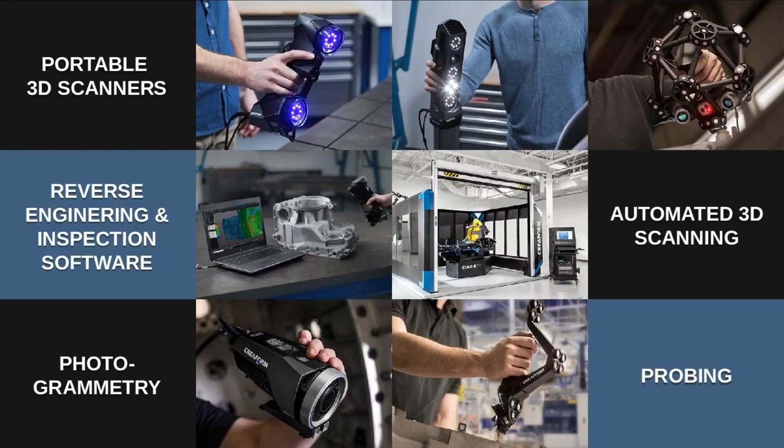What you'll see this morning is going to be a little bit about our handheld scanners, but we also do reverse engineering and inspection softwares, have an offering of automated 3D scanning, photogrammetry solutions, and you also will see a little bit of our probing solutions that we have to offer.

To begin with our handheld scanners, you'll see a little bit of the HandyScan Black Series. Several scanners within this line that have accuracies from 25 microns down to 12 microns of accuracy. Very fast scanners acquiring data at a 1.3 million measurements per second rate and can scan a variety of size parts. The scanner is also ISO 17025 certified. So if you need that capability, it's there for you.

In addition to this, we also have our HandyScan Silver Series. A little bit less accuracy, but still incredibly accurate at 30 microns. A little bit slower, but it's designed for someone that's using it not as much for inspection, but reverse engineering or maybe a less accurate inspection. Very fast, 480,000 measurements per second, same large part size range for this one.

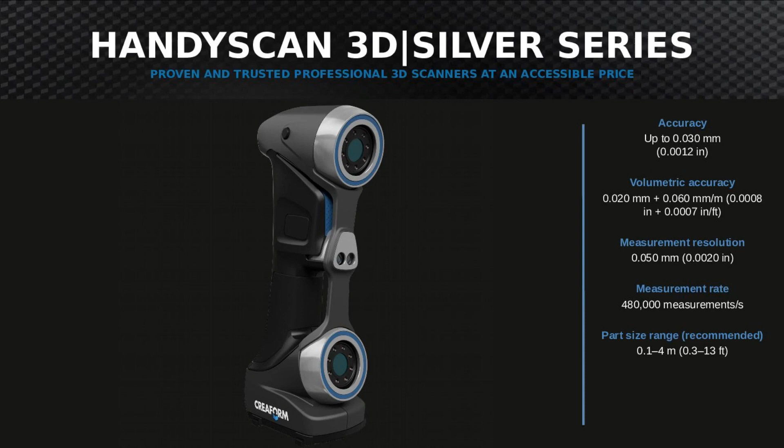This one's available in a red laser and a blue laser, where the Black line is only available in a blue laser, which allows you to have more flexibility to scan shiny, chrome, black, white, you name it, any kind of part. In addition to that, we also have our GoScan Spark, very fast scanner.

This one measures at 1.5 million measurements per second, same range of parts, but will capture color and texture. So if you're doing architectural pieces, anything for like museum quality, where you need to capture the detail, or you're trying to use your scan for marketing purposes, this will allow you to do so. And at the end, I'll show you some of the images captured with this particular scanner as well.

As you can see here, here's a small range of what we can do with the scanners. This is a HandyScan in use. You're scanning everything from a helicopter to brakes to landing gears to motorcycle parts. A range that's basically unlimited for you. Simply placing targets on the environment or on the part itself allows you to scan that part.

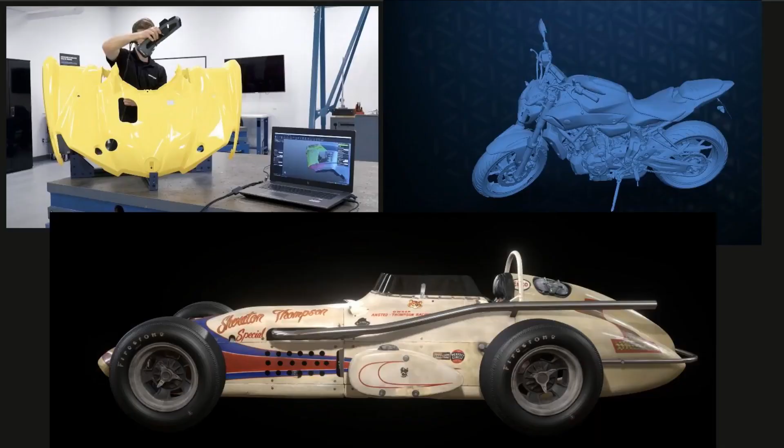And then when you talk about the GoScan Spark, you have the flexibility of scanning parts like this. You can scan a whole motorcycle with less targets, if any targets at all, because it will use the geometry and texture to track itself. On the left-hand side, you'll see that we have no targets on that part to scan that hood. And as I mentioned earlier, you can scan in color.

So the item you see in the bottom here, this whole race car was scanned with a Go Scan Spark, capturing all the texture, all the lettering, color very accurately. Now that you've seen a little bit of our handheld scanners, I'm going to turn it back to Melissa, and you'll go over to the demo.

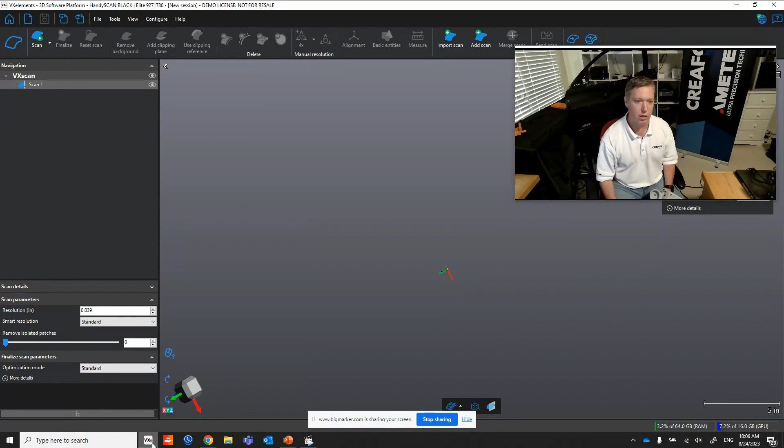So I'm going to dive into some of the technical stuff and show you exactly how these scanners work. We're going to show two scanners this morning, the HandyScan and the MetraScan. So let's start with the HandyScan. This is it. Weighs 2.1 pounds. This is a laser scanner.

So we have laser cross emitters right here in the middle and two cameras that see those lasers projected on the part. And that's what, through stereo vision, creates the 3D model. Now, these cameras look sort of unorthodox because they also emit infrared light. Since our systems are purely handheld, they're not fixed on a tripod and they're not on an articulated arm that is sort of trying to figure out where the scanner is.

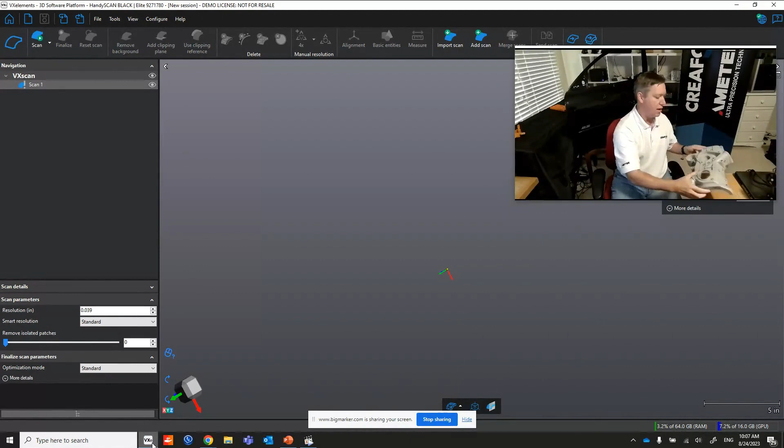This scanner knows where it is by using targets. And when I say targets, I mean these retroreflective stickers that the HandyScan requires in order to know where it is. It's just like constellations in the night sky. When the cameras can see these targets, it's able to very accurately know where the scanner is relative to the surface.

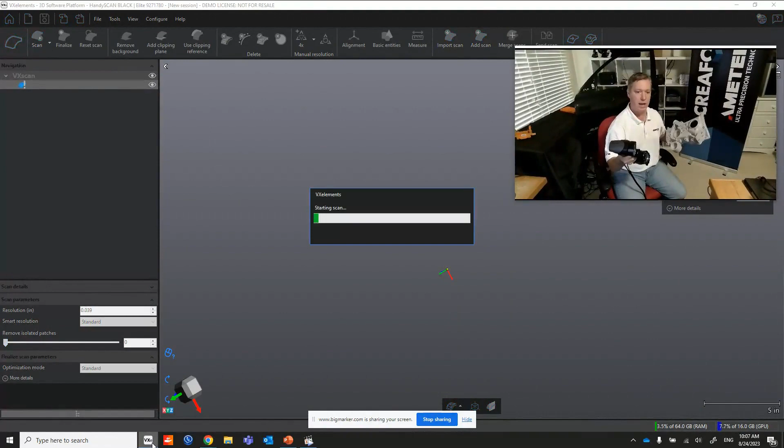All right, so enough talking. Let's just turn on the scanner. We'll tell it to start a new scan, and we'll start scanning. Now, the Creaform software generates this mesh model in real time. So you're able to easily see everywhere you've scanned and everywhere you still need to scan.

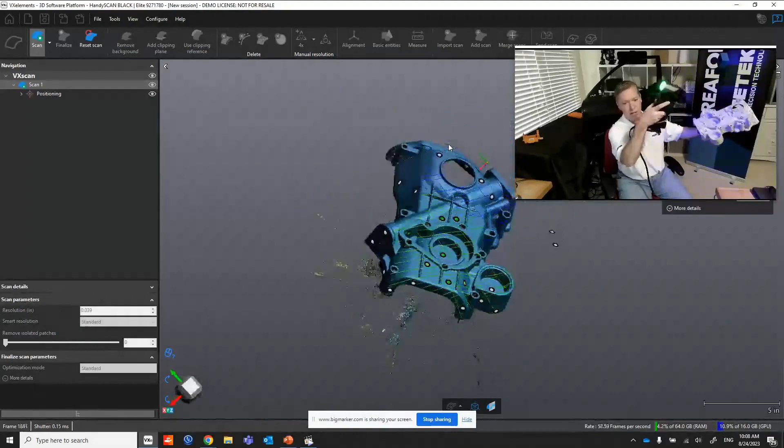And if you need to stop or look at the model, rotate it on screen to see where it is, or even leave the part and come back hours or even the next day to continue your scan, you can always resume. Now, as Rich said, the accuracy of the HandyScan Black Elite that I'm using is 9/10 of a thousandth of an inch.

All right, let's say our scan is complete, and let's look at what we have. So I'm going to click on the model to select everything connected to the point where I clicked and get rid of everything else. I don't normally hold parts while scanning them, but it makes for an effective demonstration to understand the scanner simply knows where it is relative to the part and the targets on the part. So it doesn't matter if we move the scanner or move the part, everything will be aligned.

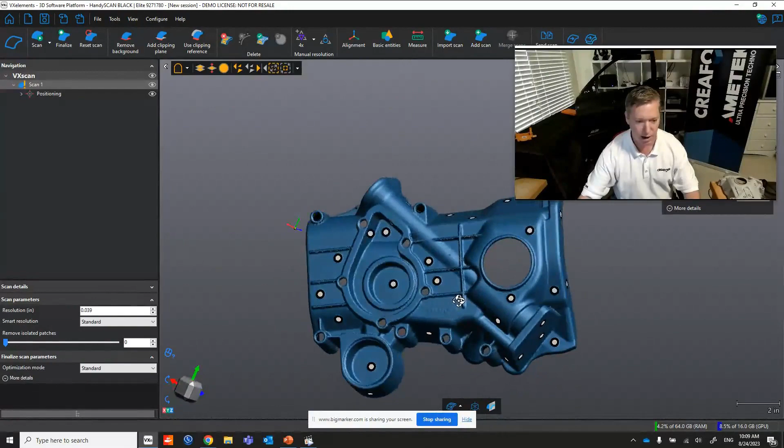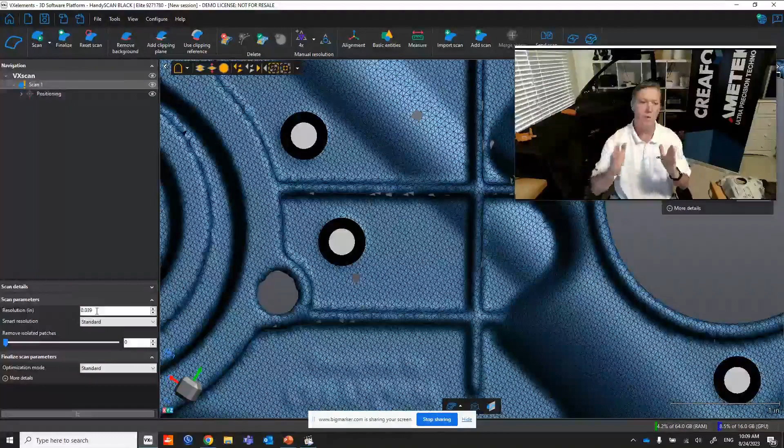Now I'm going to turn on the triangles here, and you'll get an idea of what we've captured. So you see this very regular spacing of triangles. And so this is because I've set the resolution of my scanner right here to 39 thousandths of an inch. And that means you'll see approximately 39 thousandths between each vertex of all of the triangles that I have. Now this scanner will go down to 4 thousandths of an inch for spacing. So almost 10 times higher in one dimension.

But if I just captured 20 megabytes of data on this one part, if I was to scan it at the highest resolution possible, that would be 10 times more data in X, 10 times more in Y, 10 times more in Z. I could potentially have 2 gigabytes or more data on this one part. So you really need to match your resolution with what your needs are.

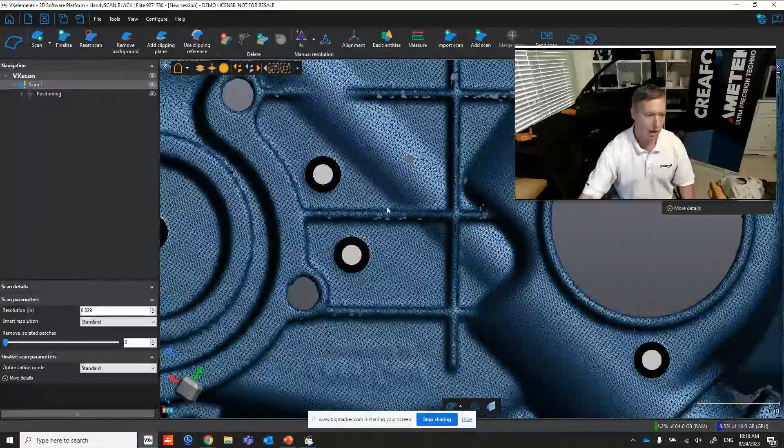Now, the other thing we're looking at here, our initial triangulation, this is a preview model. This is showing you where you've captured data and where you might still need to. To get to my final mesh, I just click the Finalize button, and two things happen. One, it takes all those targets, deletes them, and fills them in. The other thing it does is it looks back at the scan data, and it will use more information if it has it available in regions of higher curvature.

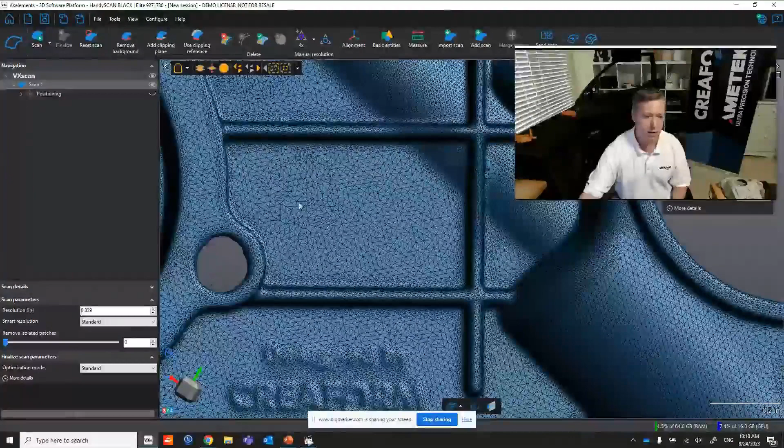So here you can see that the triangulation is sparse in flat regions, but it's more triangles along these ribs and in all regions that have more curvature on the model. So that just makes it so you don't have to scan the entire model high resolution and then thin it down to get something lightweight. The software will sort of automatically increase resolution in regions that need more data.

All right, let's look at another scan. Because you might be thinking, well, that works great, but all my parts aren't matte gray. They're sometimes shiny, they're metals, things like that. And these sorts of things have always been difficult for 3D scanning.

So here's a chromed plastic hubcap. This is unable to be scanned at all by some scanners unless you spray it with a powder or something like that. But with the blue lasers and the Creaform scanners, we can scan this material. Now, I do need to adjust the scanner settings for something like this. But again, the scanner takes care of that for me automatically.

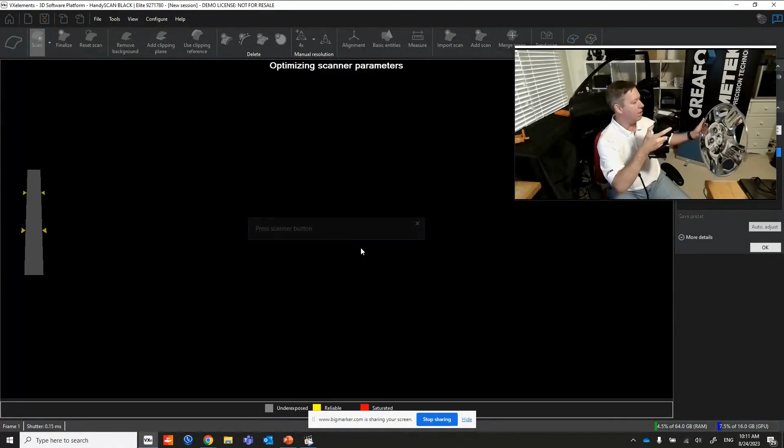I just pull up on the back on the scanner. I click on Auto Adjust on the on-screen menu. I point it at the part and move it around and let it figure out how it needs to adjust its settings to best scan this surface. Again, start a new scan.

And now I can scan even highly reflective surfaces without any treatment. So this will work for machined metals, dirty surfaces, shiny surfaces, dark surfaces, can all be scanned without any treatment. And again, that's just the preview mesh. It looks even better when we finalize. All right, so that's the HandySCAN.

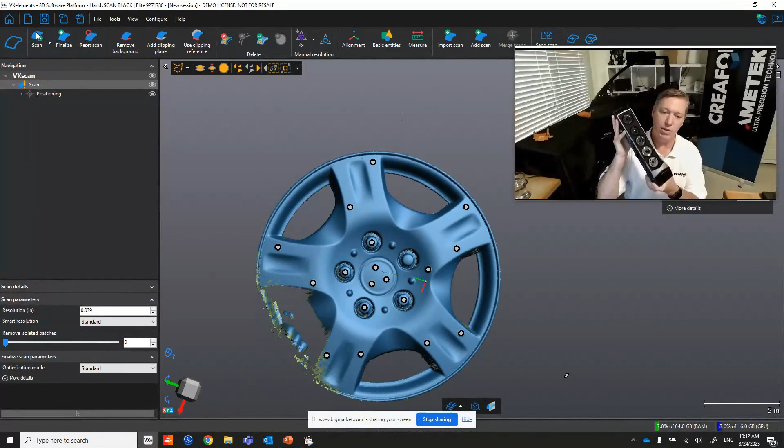Rich also told you about the Go!SCAN, which I won't demonstrate this morning, but this is the structured light scanner that can operate without targets if there's enough locking geometry to use it. It can also capture color, and it's another great portable scanner. But its downside is since it doesn't use lasers, it can't capture shiny and reflective surfaces as well as the laser-based solutions. So if you're working with shiny or machined metals, we highly recommend the lasers. If needing color is part of your requirements, then this is a great way to go.

All right, we're now going to switch over to just talking about the MetraSCAN, which is exactly the same, but completely different. So the MetraSCAN has exactly the same accuracy as the HandySCAN. It's accurate to 9/10 of a thousandth of an inch, and it uses laser cross emitters and 2 cameras to scan the lasers on the part. It'll scan shiny parts and dark parts and everything else.

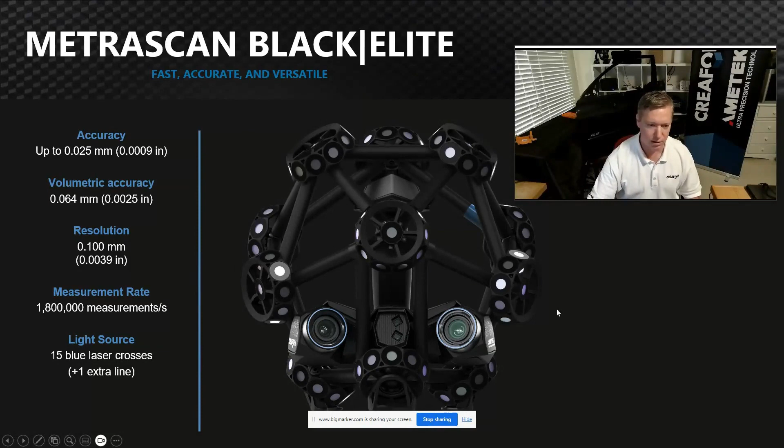But the difference is these cameras will look a little more orthodox, like regular cameras, because this scanner is not looking for targets. The targets are placed in this frame around the scanner, and that frame is seen by what you see here in the background, called the C-Track. The C-Track is a stereo tracker that tracks the position of the MetraSCAN in a 16 cubic meter volume. So that means that small parts, large parts, we can scan all of these things without placing targets on the part because the targets are on the scanner and tracked by this apparatus.

So let's show you exactly what that looks like. We'll go back to our software. I've got the MetraSCAN connected. And this is the MetraSCAN. Now behind me, I have a dented car door. And again, this is a black, shiny surface. And so in order to scan this part, I'm going to have to, again, adjust the settings of the scanner.

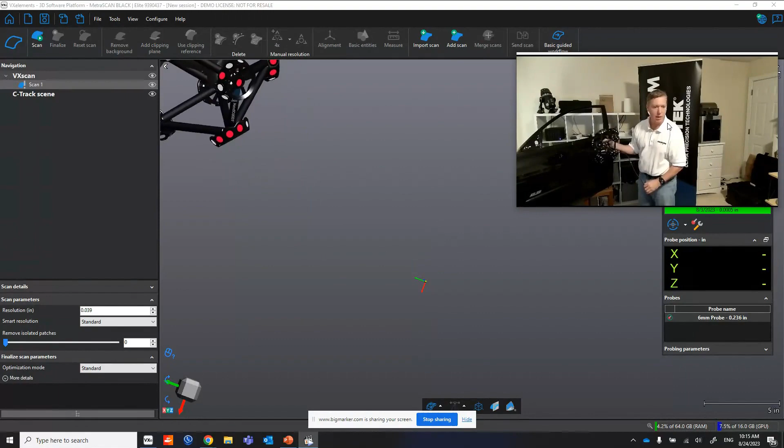I just hold down the on-screen button. I go down to Auto Adjust. Point it at the surface, let it automatically adjust its parameters for this particular type. You can even see in the camera that it's increasing the laser power. And then I just hold down the button to make a new scan. And I start scanning.

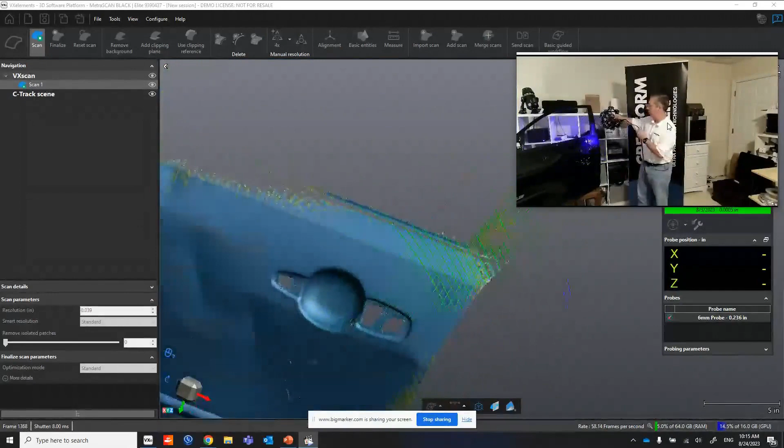In this particular example, I'm scanning at exactly the same resolution that I was using with the HandySCAN, but now I can scan a very large area without any targets. And so we commonly see this at our larger automotive and aerospace customers, also heavy equipment and large manufacturing processes with large tools and dies that need to be able to scan large parts or assemblies without having to put targets on all the time.

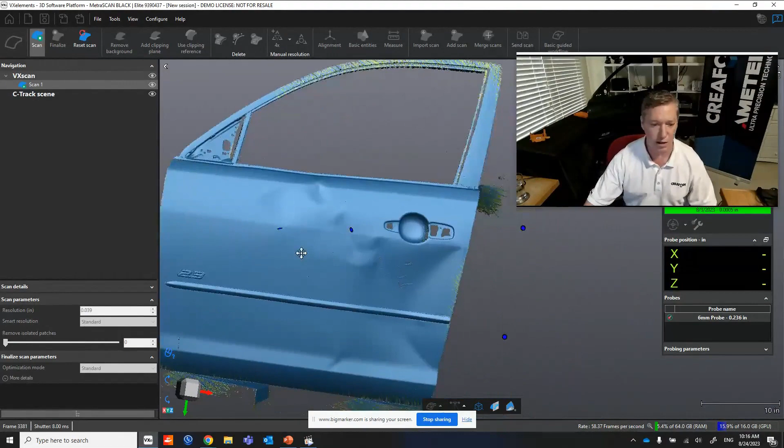All right. And we can clearly see the dents in the door now that I see it on screen. A little harder to see in the video, but it's a very damaged door. I'll do a similar process here that we did with the first model we processed with the HandySCAN. I'll just select all the data connected to where I clicked, and we'll let that finalize.

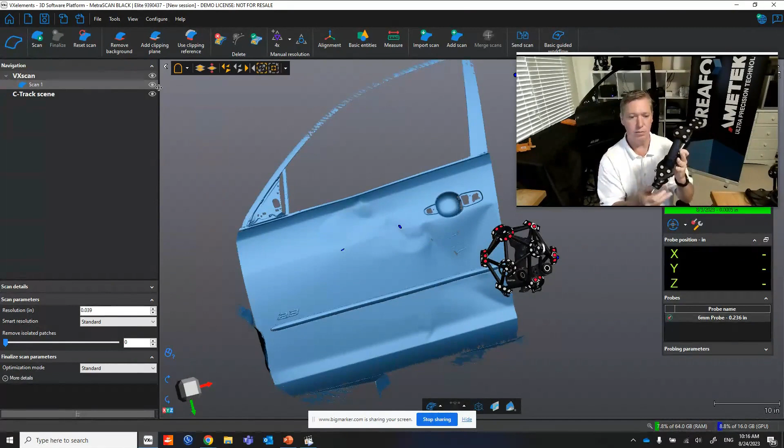Now I want to talk about another component of the MetraSCAN C-Track system, which is the HandyPROBE. This is a probing device that is handheld and wireless. We have a standard Renishaw probe on the end. This is a 6mm ruby tip on the end, but you can use almost any standard Renishaw probe. And this probe is tracked in space. So you can see on the right-hand side of the screen, my digital readout for this probe.

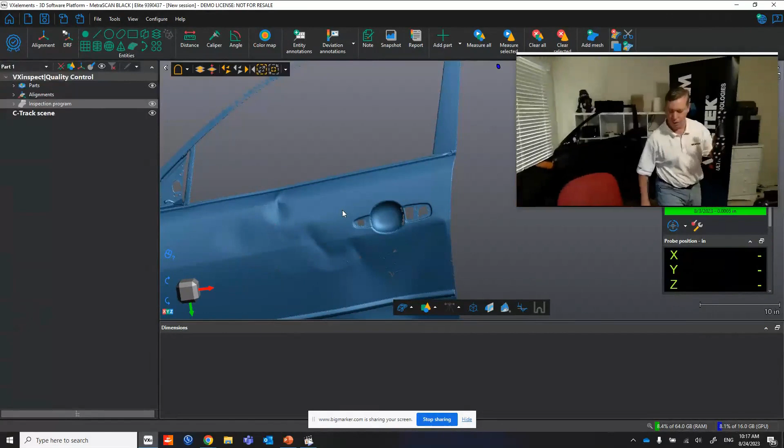So I'll take the scan we just made into our inspection package. Let's zoom in here. If you want to do quick measurements and you don't want to scan an entire part, you can do that with the HandyPROBE. And it again has on-screen menus that I can click on the device and say, all right, I want to do a quick measure of a distance between 2 points. I will place the probe in one hole on the door. I'll put it in another hole on the other side. And you'll see that I can make point-to-point measurements.

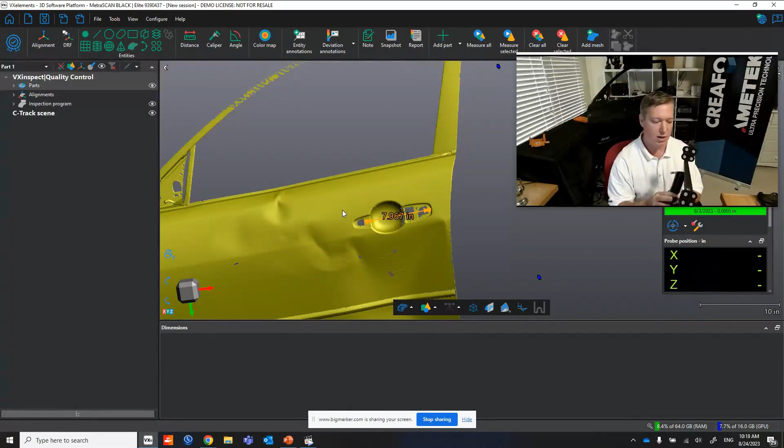I can define planes, cylinders, spheres, all the standard things you would expect from a probing device, but completely wireless, and it works in the full 16 cubic meter volume that we have for the MetraSCAN. And it's a very useful tool when you're trying to just take some simple measurements or features. And you can use the HandyPROBE without doing any scanning at all.

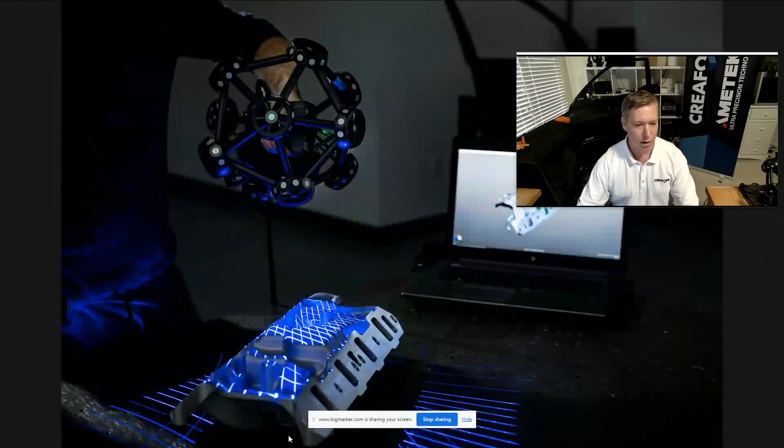All right. So quick review on the MetraSCAN. You can scan small parts. We can scan large parts. And again, things we say about Creaform is it's accurate, it's portable, and it's easy to use. And a lot of times people say portable means that I could take it to a supplier site or another facility and scan there. And that's completely true. But also portable means you can take it to places in your own facility. You don't have to bring all of the parts into the CMM lab or the quality lab in order to measure them. Sometimes you bring the scanner to the part.

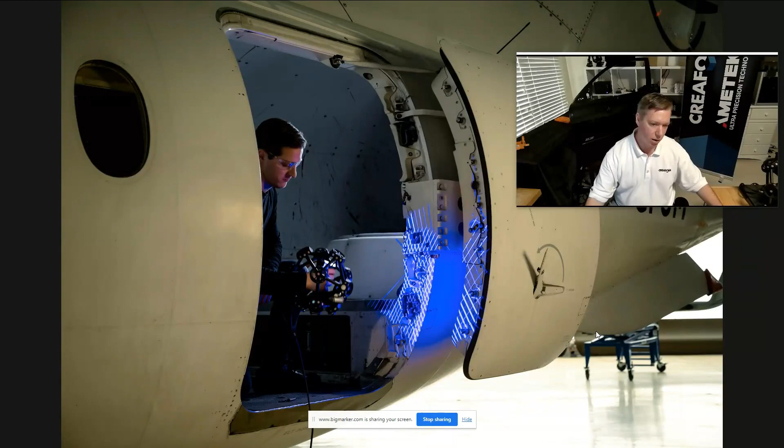And again, we talk about portability. Some things you could never take into a room, especially when you're scanning almost inside of a room, like inside of an aircraft. But we can set up the MetraSCAN or the HandySCAN and capture these interiors, capturing the as-built conditions of these things. We can scan assemblies, door openings. Aerospace and automotive are great applications for this. But anyone who's producing parts can get benefit from this technology.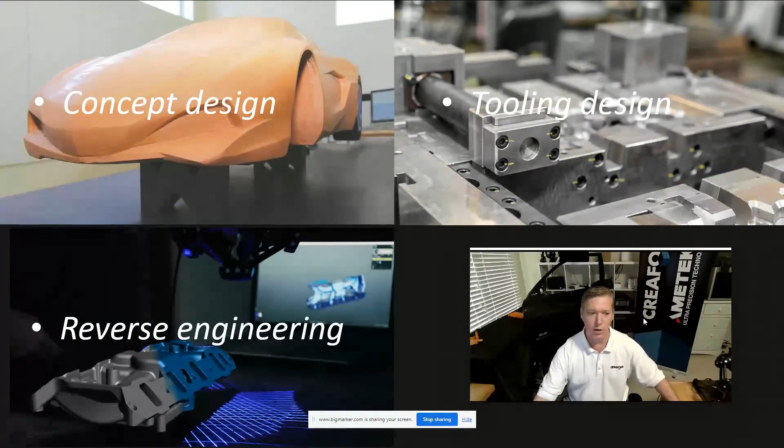So, little review. What can it be used for? Concept design, tooling design, reverse engineering, quality control, scanning assemblies, things in production, aftermarket parts. This field has just exploded in the last 10 years. Doing aftermarket parts without 3D scanning is just handicapping yourself. You can scan parts, make new parts, replacement parts, alternate parts, parts that are no longer available. It's a great market for 3D scanning.

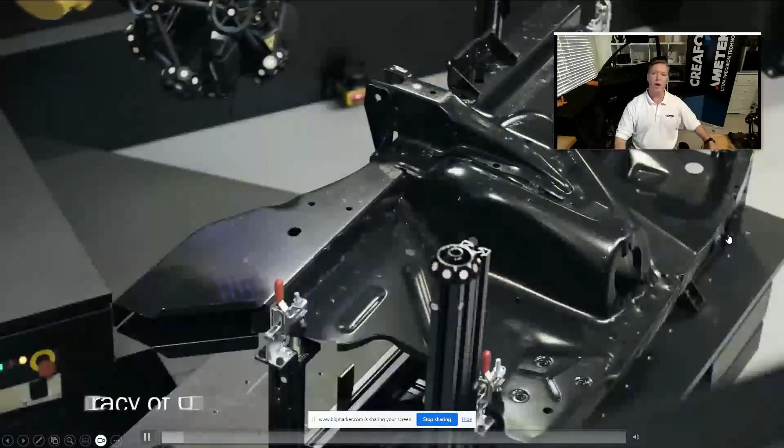All right. If you're doing inspection, it seems like a no-brainer that you want to automate that inspection. And Creaform has introduced, using the MetraSCAN that you've just seen, a fully automated version that we call the CUBE-R. This is a full robotic system with the same MetraSCAN and C-Track technology we just demonstrated that can automate the inspection of your parts.

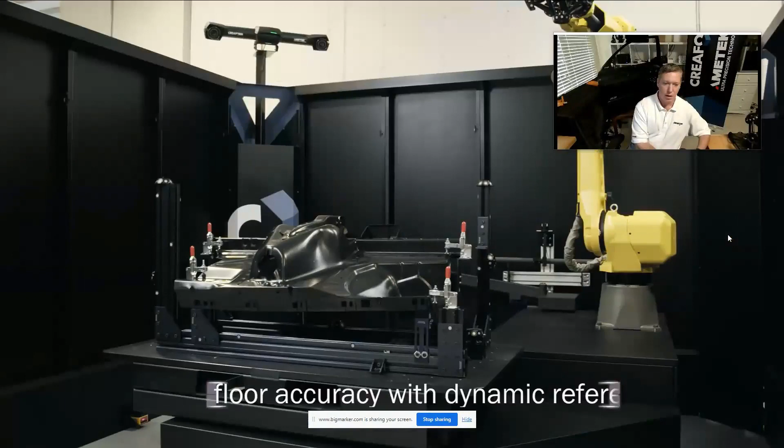So here's a complete cell. It's ready to go. We bring it in, we drop in the whole system, and in 2 weeks, you'll be up and running, installed, setting up your parts for scanning, and getting results.

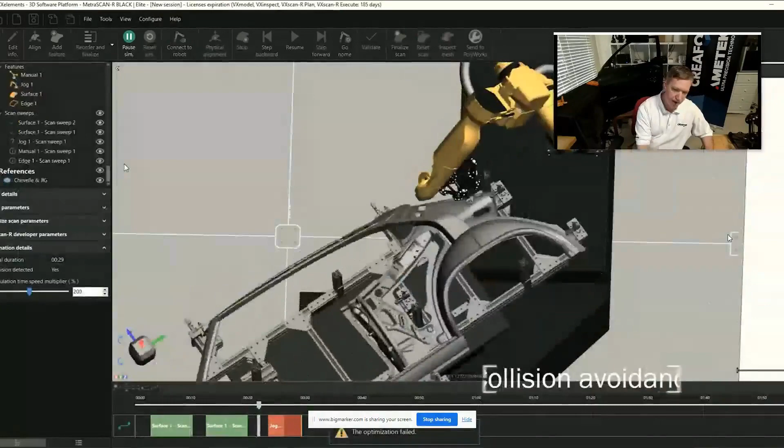The programming of this system is all driven by CAD, and it can be done by someone who has no familiarity with robots or automation, because we're not using the teach pendant to try and define positions and orientations of the scanner one by one. You're using the CAD model to define how you want to scan a part.

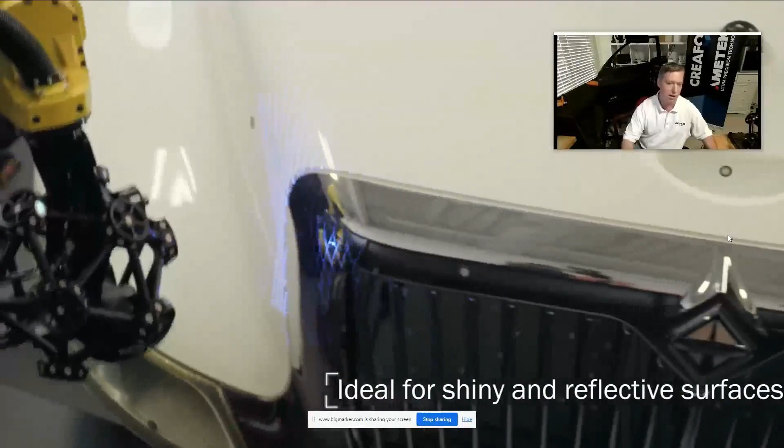You click on a few surfaces, it knows how the MetraSCAN works, it knows how the robot works, it knows not to collide with your parts or fixtures, and it can automatically generate the robot programs defined to scan these parts. And then once that program is done, you can scan 1 part, 10 parts, 1,000 parts, or just repeat over and over again whatever you need to scan.

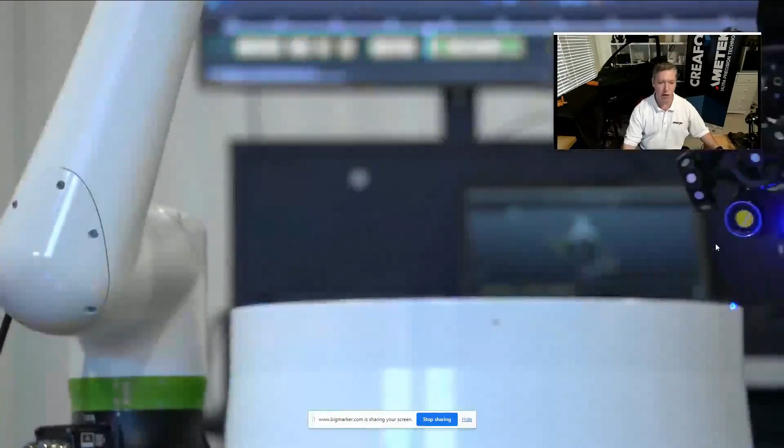Now, if your parts are not quite as large, or you're looking for something without the same footprint as a large industrial robot, last year we introduced our MetraSCAN system on a cobot system. So this system will work side by side with your operators. Again, exact same technology. MetraSCAN, C-Track, tracking the scanner. But if it runs into someone, it's perfectly fine. The system will simply stop and then resume when you tell it to.

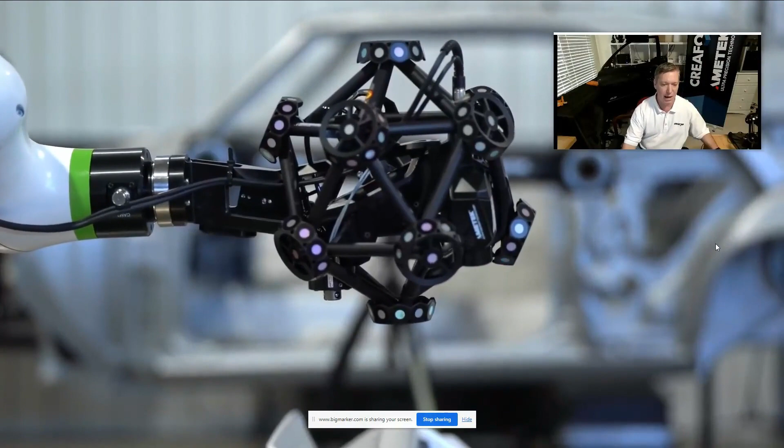So you can use this system, again, side by side with human operators, the goal being the same, to automate scanning and inspection of parts by automating the scanning process so an operator doesn't have to scan it over and over. So you sort of choose the application that makes the most sense for you. A portable system that is robust and you can scan whatever parts you want with a HandySCAN or a MetraSCAN, or a fully automated system with a MetraSCAN on a robot to scan your parts over and over.

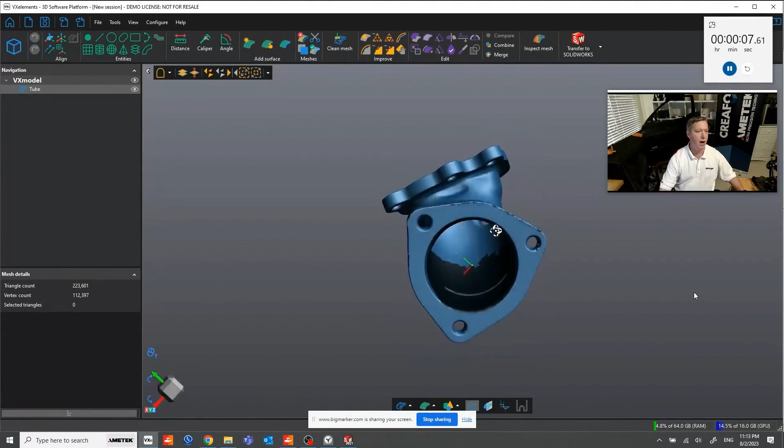All right, so we'll stop there for a second and now let's talk about what we can do with this scan data. So our market is split almost 50-50 between reverse engineering and inspection. And so I'm just going to walk through an example. This one's pre-recorded, of a simple reverse engineering task. And so Creaform has 2 softwares, VX Model for reverse engineering and VX Inspect. And so what I'm showing you now is VX Model. And we're starting with this simple pipe model to do a reverse engineering project.

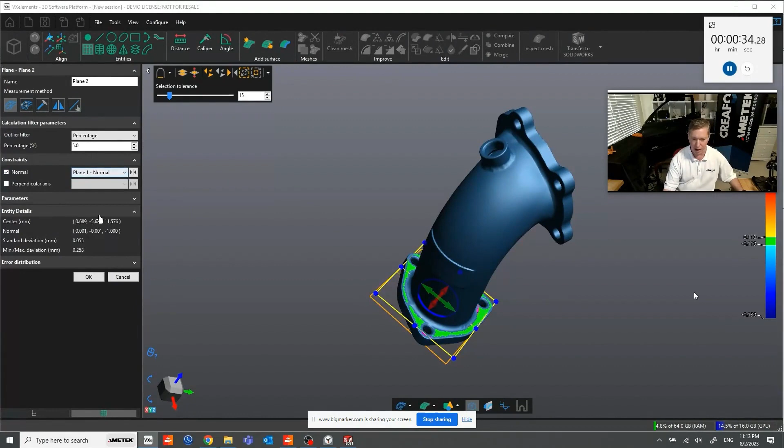So VX Model allows you to capture features easily on the part. And so we'll do this similar to how you would model it yourself if you didn't have scan data to go on. So I can extract these planes, I can define planes to be parallel to one another. And what I really want to do here is extract this profile at the end so I can send it over to CAD to construct a new CAD model. So I make a plane in between the 2 planes here. I'm going to cut a cross section using that central plane in the middle.

And so now you see all the entities that I've created in VX Model. I've got the planes, I've got the cross section. And so I can save this as IGES or STEP and send it to any package. But for SolidWorks and Solid Edge and Autodesk Fusion 360, I can send all of this stuff just directly over to the CAD package with one click.

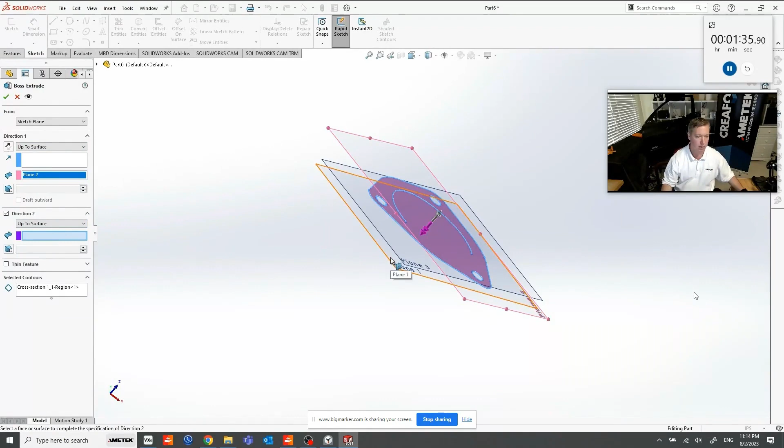And so it's a very easy workflow to go back and forth between VX Model and your CAD package to make things happen. So here I've brought in that section. I'm extruding up to one plane, down to the other plane, and I've started to make my solid model of exactly what I need. Now keep in mind, I didn't do any measurements to say how big is this, where is this? I'm just using the scan data to drive.

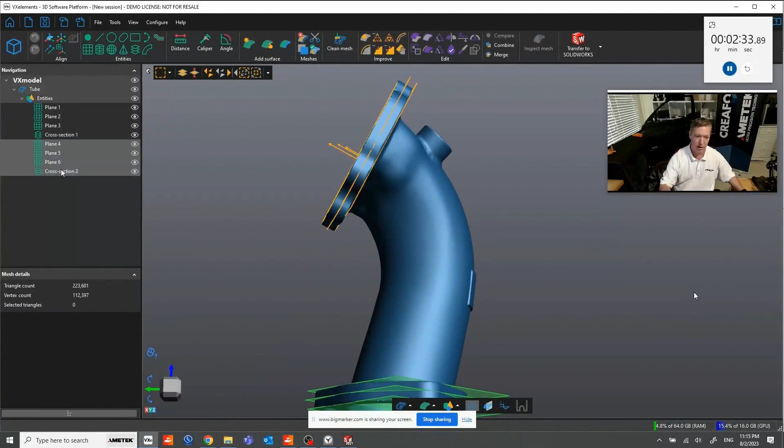So now I'm going to do the same thing on the other end. And for the sake of time, I've sped up a little portion of this video because we're essentially doing the same thing we did on the other end. I've defined my planes, I cut a cross section, I send it into CAD, and we extrude those ends. Now you can see a real timer in the upper right-hand corner of the video that shows the total length of time for this video. We're only going to spend about 6 minutes on this, but the total time is closer to 14 minutes start to finish.

So here in this little inlet on the side, I'm again cutting a cross section to get the dimension, but in this case, it is a circle. So I'm going to fit these to be perfect circles and send these circles over to SolidWorks so that when I do use those to make an extrusion, it'll be perfect circles that I have. Now, the hard part on this model is the sort of organic freeform shape that we have in the middle.

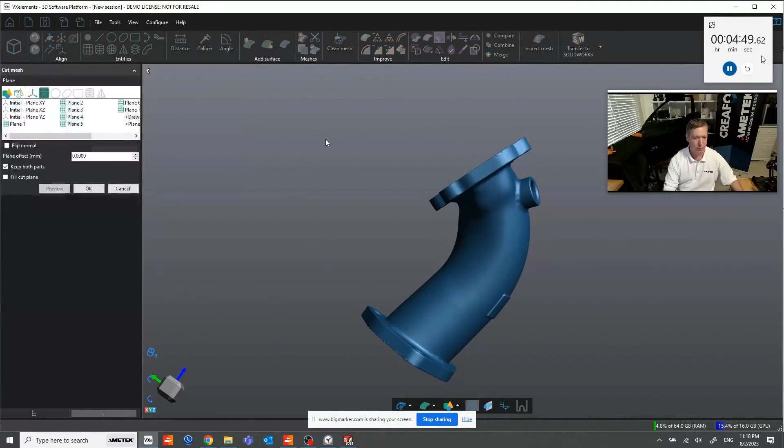So this would be very challenging to model and actually get an accurate surface with any conventional tools. Well, we're going to use the scan data to the best of its ability. And so the first thing I'm doing is, now that I have the ends modeled, I'm going to chop off the ends. I need to get rid of the inlet as well, so I'm going to cut that out as well.

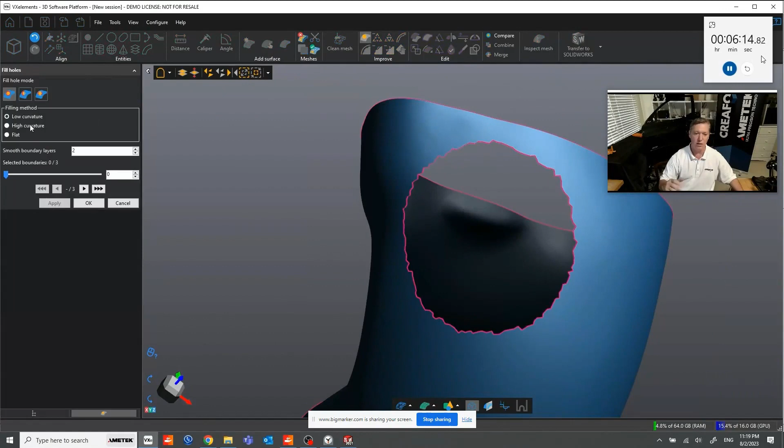And we use the polygonal editing tools to fill in these regions. So just with a click, I can fill it in. Here's an embossed label that I'm going to select around and defeature. And it will automatically replace the surface with a logical continuation of the surrounding area.

Now I'm also going to take these ends and extend it, because as I model it, I want those ends to extrude beyond those solid ends that I've made. And we'll come back to that as we start putting it together. Now, how do I make a surface of this? We have a function in VX Model called auto surface.

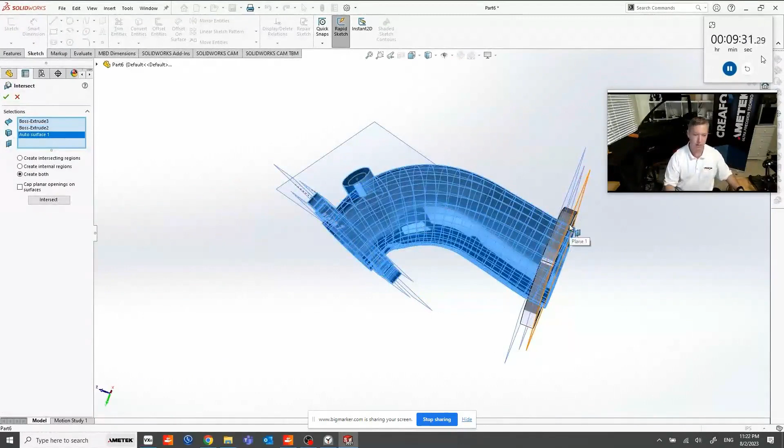And this will create a patch network on the model that is essentially continuous NURBS patches that come together to define this. So I've converted it from the STL mesh into an actual CAD representation of a surface. Now that I have my 3 extrusions and that surface, I can use the intersect command in SolidWorks to join them all together and to make this solid model that you see.

And we know that it's a solid because I can add fillets in between these different items to get closer to my final model. But again, now I have a solid, and a solid wasn't my intent. I need to make a tube of this thing, because the original model was a tube. But if you've worked with complex surfaces in CAD and you try to make offset surfaces from them, you know that sometimes those offsets can fail in your CAD package.

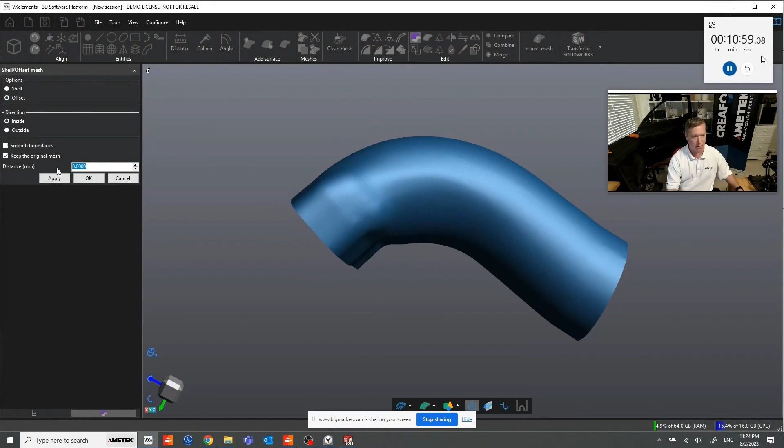Making offset surfaces when you're in the polygonal world, like we have in VX Model, is much more robust. So here I'm using the offset surface command in VX Model to make an offset surface from the outside that is exactly 1.4 millimeters from the outside model to the inside. So here you can see those 2 surfaces.

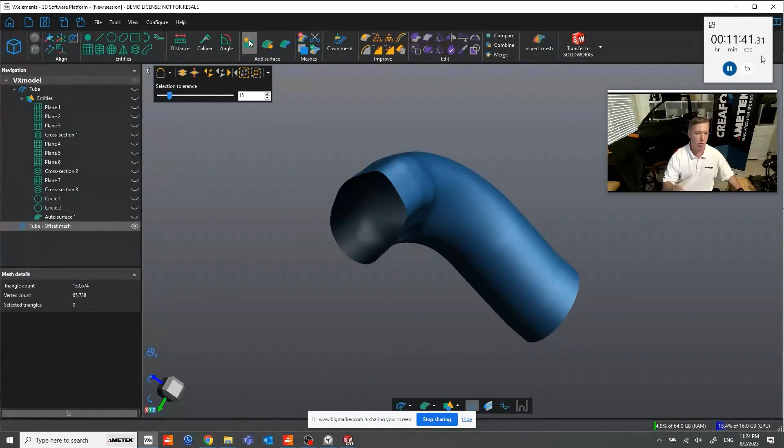So I'm going to view just that inside surface now, and we'll use the same tool we had before. We're going to make an auto surface of now the interior wall. And so that's going to, again, generate this organic NURBS patchwork that precisely matches that complex organic shape. We will send that over to SolidWorks, and now we can use that interior surface to cut away the inside.

You just have to select that surface, and using the surface cut command in SolidWorks, we cut out the inside, and we'll be back to having this tube model. And again, we've gone from the STL triangulated mesh to now a complete solid model inside SolidWorks.

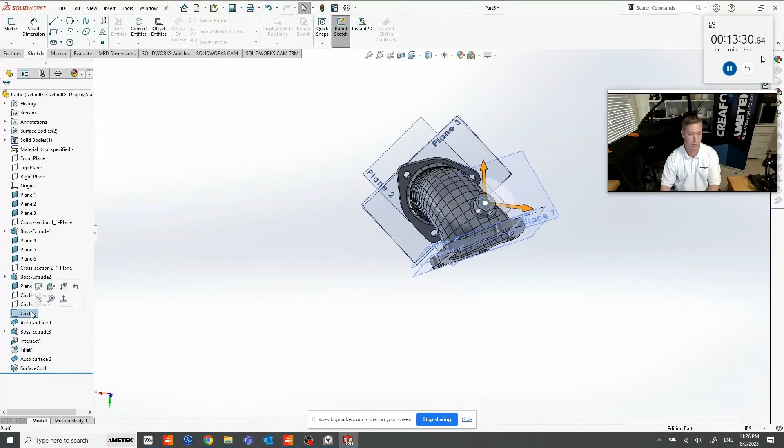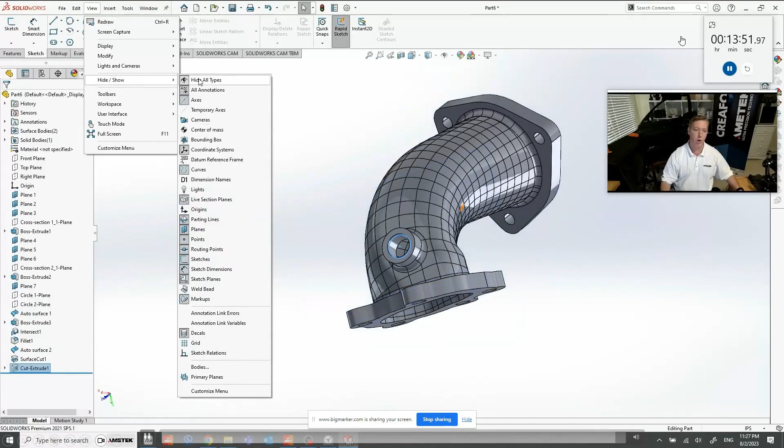One more thing to add here, a little extruded cut using that inside circle on the inlet. And so we can just blind extrude into our model, do a cut. And so now we've got our final model. And again, looking at the timer in the upper right of the screen, it was right around 14 minutes total from end to end to generate the whole model.

And you can apply this similar workflow going back and forth between VX Model and your CAD package. It can be SolidWorks, it can be Inventor, it can be Fusion 360, and it can be Solid Edge. But if you don't have one of those packages, you can do exactly the same process by exporting IGES or STEP files instead of having that direct transfer link and doing the same process we just showed here. All right.

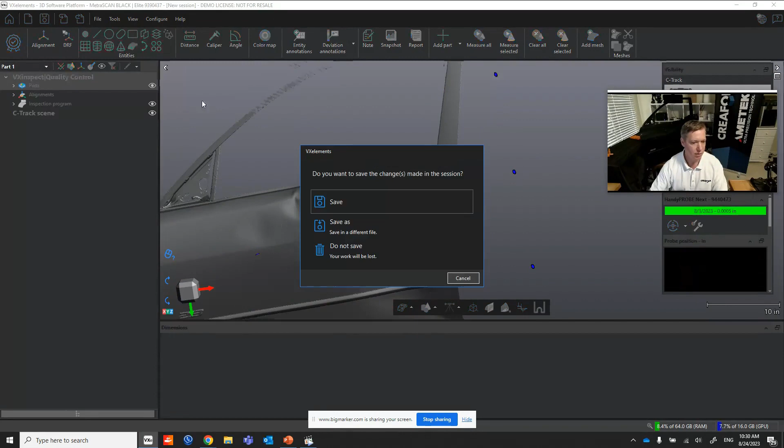So that's the reverse engineering world. Let's start talking a little bit about the inspection world. And I'm going to show you some of that live using the software. So let's just make a new session here. And we will look at quality control. We'll turn off the scanners for a minute.

And now I'm going to import a simple model. This is a scan that was made with the HandySCAN. And it's just of this sample part I have from a long time ago, a plastic part. So once we have this scan data, and again, it's just triangulated data, what can I do with this?

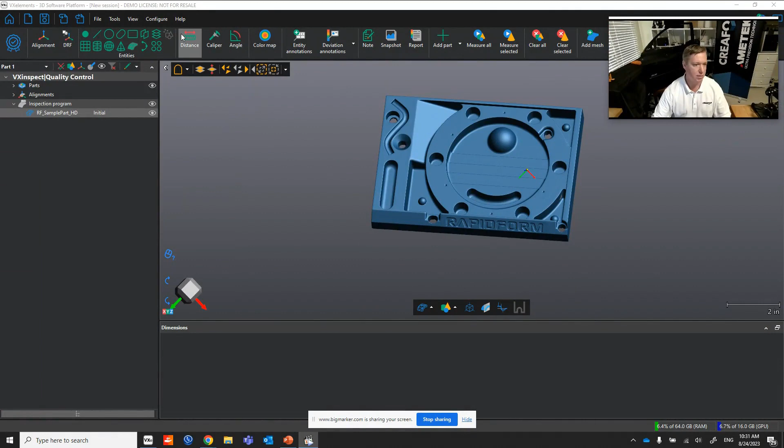So the very simplest thing we could do is take a measurement. So I can say measure distance from this side to this side. I got 7.540 inches. Well, what if I measure that again? If I say, all right, let's do another distance measure, and I'll measure from here to here. Well, now I get a slightly different measure.

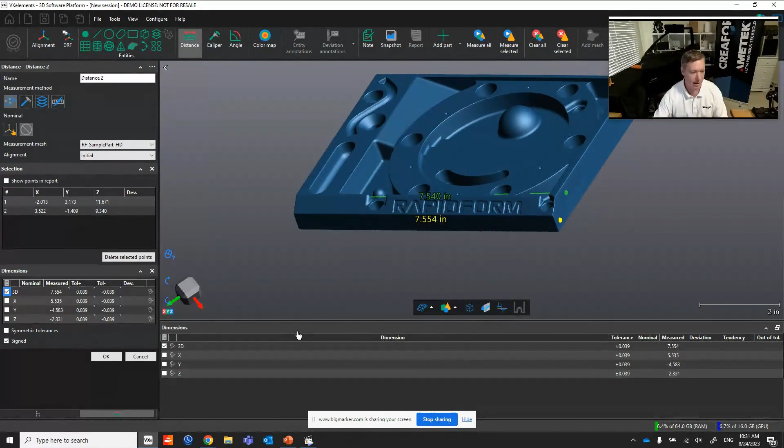And this is exactly the same if you were to pick up this part and have one operator use a pair of calipers and measure it and another operator use a pair of calipers. You might get slightly different numbers. Now, to be fair, what I just measured was not really a caliper measurement because it was measuring the full 3D distance between those 2 points that I picked. So we're going to need to use our virtual caliper to measure.

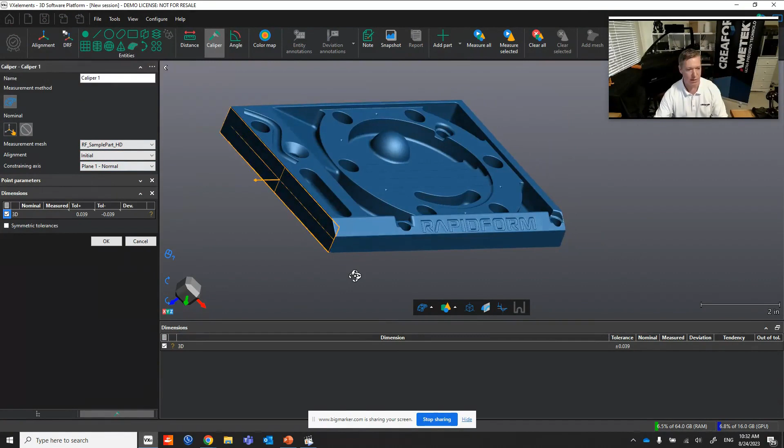So the first thing I'm going to do is extract a feature plane, which I'm just going to click on this side, and with one click, it finds all the planar elements connected to where I clicked, and it'll fit a plane there. And now that I have that plane, I can use its normal direction for a caliper measurement. So I'll just use these calipers. We'll say that my axis is the axis of the plane I just made, and I'll measure a point from this side to this side, and I get 7.553.

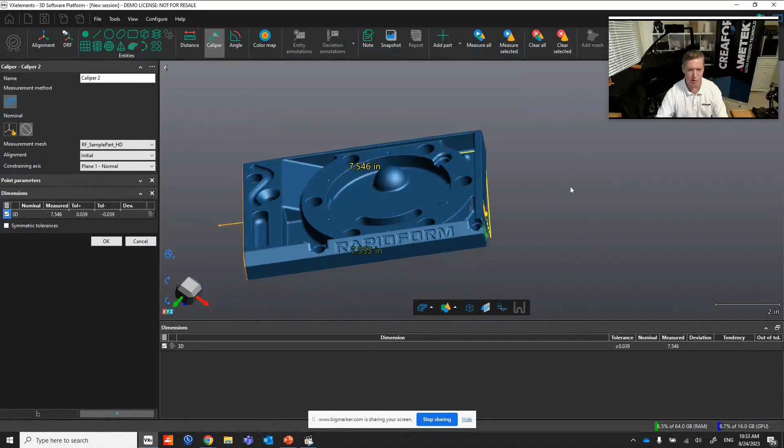Let's do another measurement on the other side of this part, 7.546. So I'm definitely more repeatable, but again, the measurement depends on where the operators click. You can even see on this part, there's even some indentions on the plastic part that if you ended up taking a measurement on the inside, it's going to have drastically different numbers for what that caliper measurement is.

So let's again do something a little different. Instead of just picking a point to measure the distance between here, I'm going to measure the distance between two planes. So I'll fit a plane on this side as well. And I'll measure the distance between those two planes. So the distance from plane 1 to the center of plane 2, and I get 7.545. And if I recreate those planes again with the same parameters, I'll get the same number, and it becomes much more operator independent.

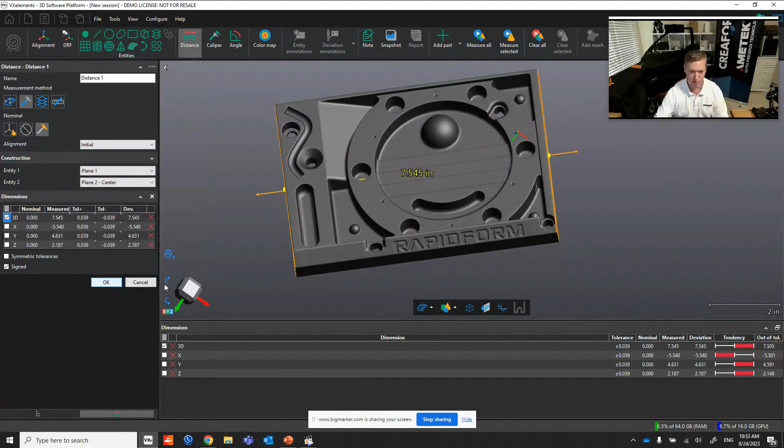Now, I was talking with a customer yesterday about, well, I could just do that with a pair of calipers and just have the number. And that is certainly true. These operations definitely work on complex parts and things that you can't measure with calipers, but there's a lot of benefits to scan data as well. Once I have this scanned, I basically have a virtual copy of the model that I could send remotely to someone in another state to look at the data, maybe even another country.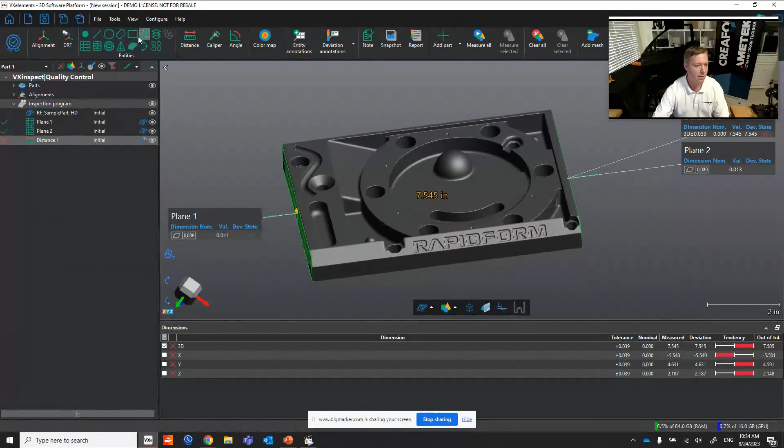I can also fully capture that data. So maybe I only had the part in my QA lab for 30 minutes. And then they come back tomorrow and say, hey, you didn't measure this. Well, I've still got the data. So if I need to make more measurements on this part, I could click to fit a cylinder, another cylinder, and then I can measure the distance between those cylinders.

And it doesn't matter if I make that measurement right now after having scanned the part, or a month from now, or a year from now. You basically have a digital duplicate of the part at that moment in time, and you can go back and take further measurements on it as required.

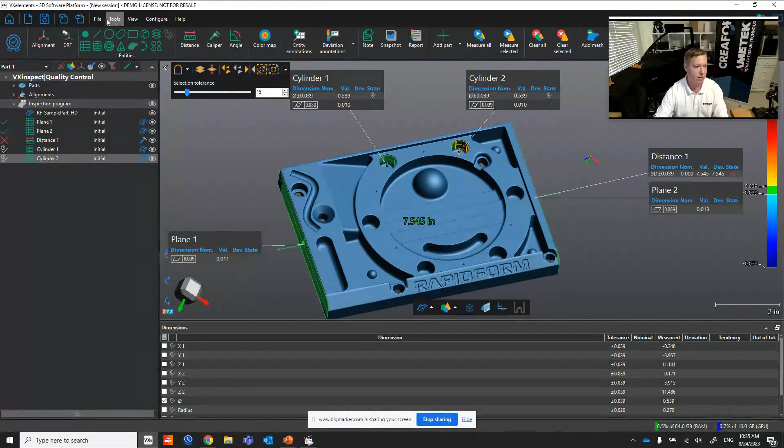All right, this is sort of the manual method where you've got a part, you scanned it, you want to extract some information on it and see what you have. That's not the most common method of doing inspection. Usually we have a CAD file that can drive what we're trying to do and also give us nominal information. So let's look at that same part again, but this time I'm going to bring in the CAD model. So here's the CAD model of this part, which we can call perfect. And here's our scan data again.

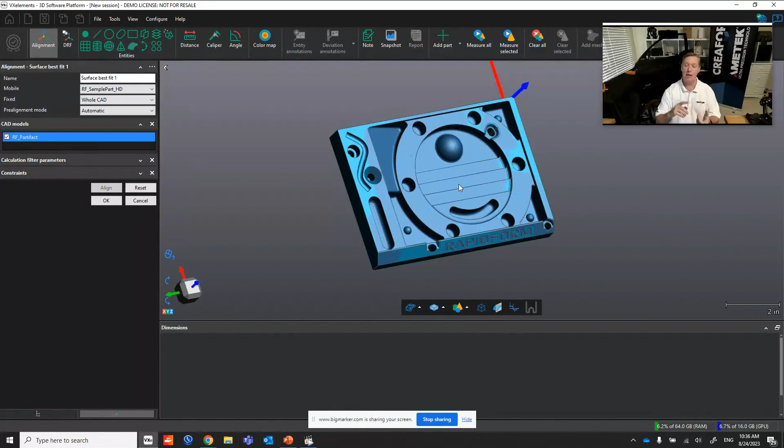And the first thing I do is align these. So in this case, I'm just going to let them do a surface best fit. So now I have my scan data overlaid with the CAD model. Now I did a surface best fit. We can do RPS alignment. We can do entity-based alignment, 3-2-1, whatever type of alignment you need to do driven by your requirements.

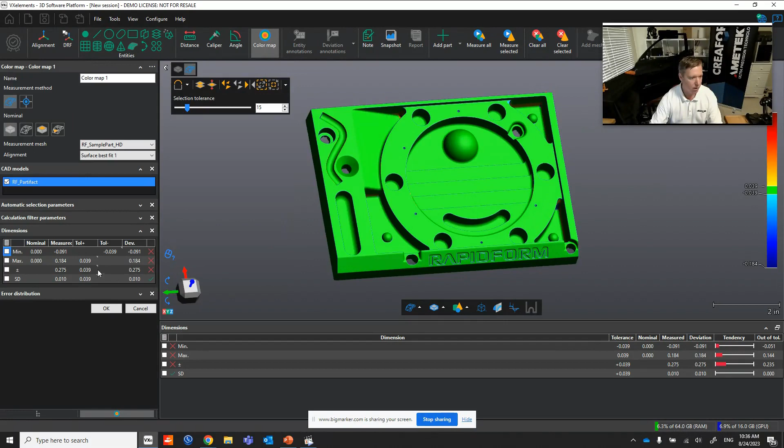After I have the data aligned, the very next thing I do is compute a color map. These sort of things are really not available to do in the CMM world because they only have sparse data, and we have this more complete data of what we're doing. So let's pull this back up. Oops, no.

And so the color map can show us, and we can adjust the color spectrum, the deviations between the CAD model and our scan model. So in this particular case, I always see greater deviations at the bottom of the wall on this model, almost all the way around. And that's because the original CAD model has straight walls up and down, and our model has drafted walls from the actual physical part. And that's why you see these deviations going top to bottom that are higher at the bottom.

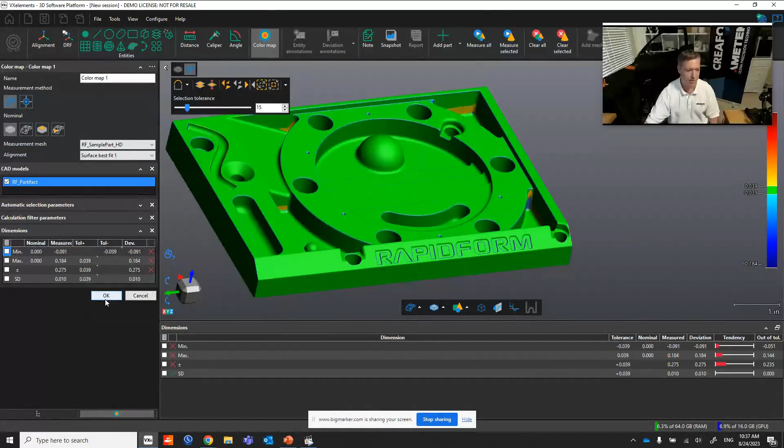Now, the CAD model can also help us to create features and do other things. So, for example, when I create a plane in this example, when I click on the model, it's actually using the CAD model as its reference and then finding all of the scan data that corresponds to that plane. And it automatically made a flatness GD&T callout for me and shows what the value of that flatness is on that plane.

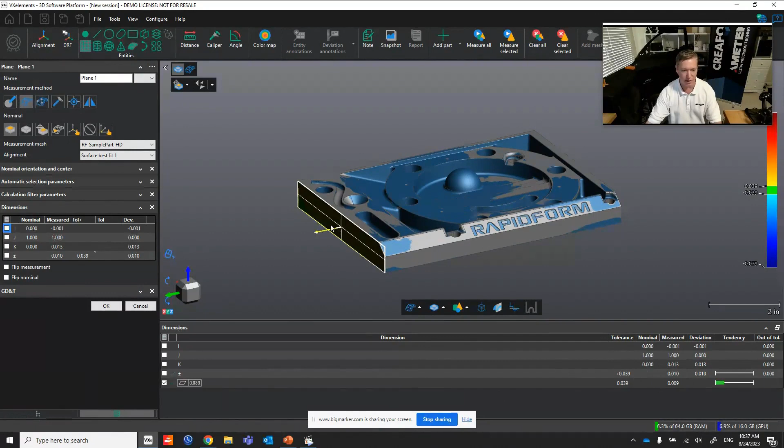I can do the same with a sphere by clicking on the sphere of the CAD model, and it finds all the scan data according to that sphere. And I can even construct planes. I could say, all right, give me a plane that's offset from the first plane I made, but then goes through the center of the sphere. So now I've got a plane directly in the middle of the model, and I could use that plane for cross sections. So we'll just say plane 2.

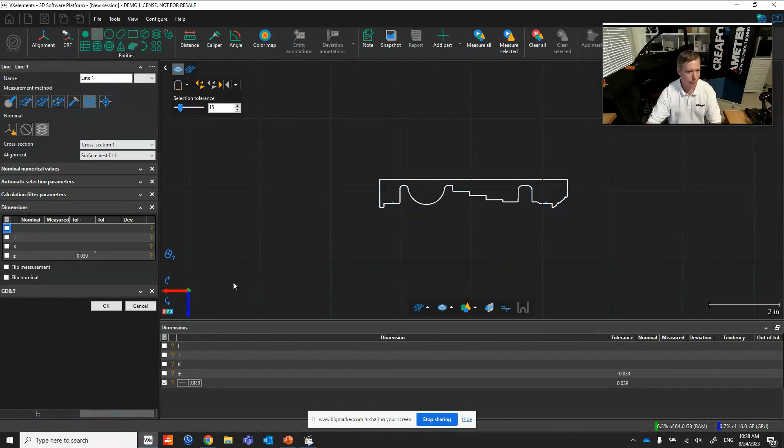Okay, maybe we want to fit some lines on that cross section, which again, fitting lines uses the CAD data behind the scenes. So when I fit, I just have to click once and it knows where that line is in CAD, and then it extracts that data in my scan data. So there's 2 lines. And if I wanted to know the distance between them, let's again look at the cross section. And we'll look at the distance between line 1 and line 2.

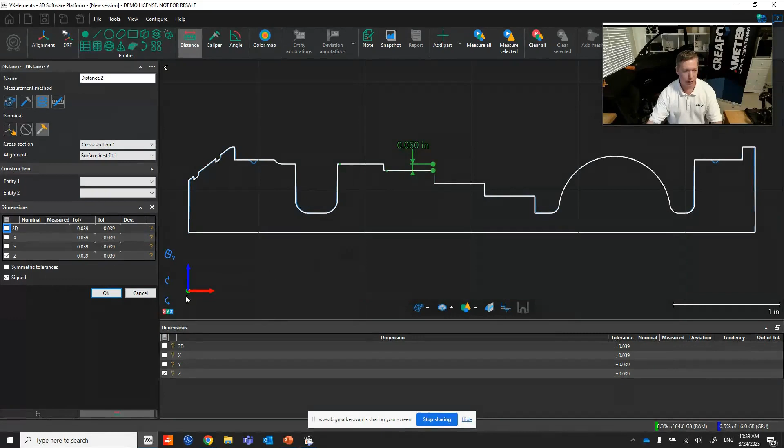And so it shows me that in the nominal model, it's supposed to be 59 thousandths. I'm measured at 60 thousandths. And so it's just slightly different. And we can assign tolerances for that to show how much it will vary and whether it passes or fails that dimension. So when we have a CAD model, we can use that CAD model to drive defining an inspection process. But the value of this is that you only have to do that once.

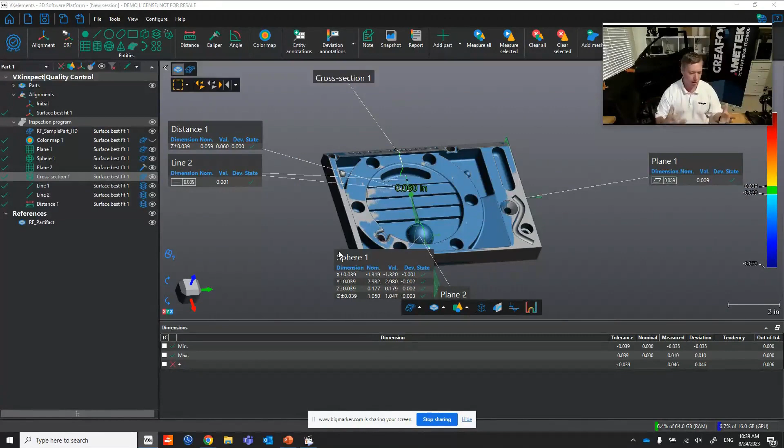So let's pull in a full model that I've already defined an inspection on the CAD model for what I need to analyze. So here's a full inspection. It's got cross sections, it's got lines, it's got tolerances defined, it's measuring cylinders. And so here's where my initial model was. I'm going to go back here and say replace this mesh. And we're going to replace it with a new scan.

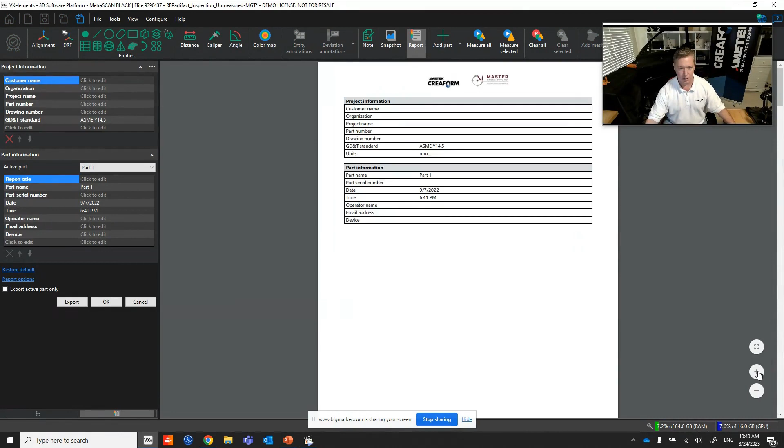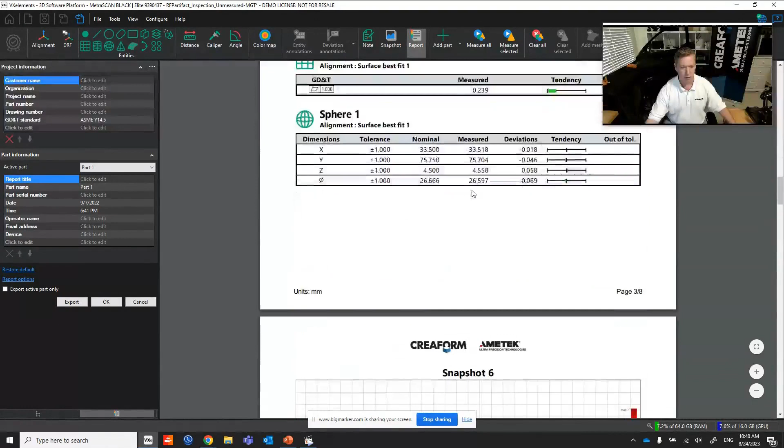And so once I do that, it's going to take that scan, it's going to align it using the alignment techniques I have defined in the process, and then it's going to inspect everything that I've defined to be inspected. And all I need to do is say quick report. And now I'm going to get a whole new report generated. And all I had to do is drop in the new scan. And so my report has all of the data that I've defined to be in the report. Screenshots of deviations, cross sections, dimensions, pass-fail information.

I've found some cylinders and I'm measuring the position of the cylinders. And if they're out of tolerance based on the tolerance that I've specified, it'll highlight in red showing how much they are out of tolerance. If they're close to out of tolerance, here I have a 150 thou tolerance, or I guess this is millimeters, so 150 microns. It's out by 143, so it shows that it's near the end of the tolerance, but not quite out. There's another one that's out by 17.

So again, if you have to measure 5 parts, 10 parts, 20 parts, you're really only defining that inspection process once on your CAD model, and then you get a new scan, you drop it in, and you get a new report. The latest software we have also has batch processing. So you have a collection of 20 scans. You can just auto process all of those, get reports for each one, and you'll be good to go. And that's inspection. So again, we show VX model for reverse engineering, VX inspect for inspection.

But I would like to say that Creaform's output from the scanning is compatible with every other package in the market. So if you're using software from Polyworks or using software from Geomagic or using Metrolog, you can know that the STL mesh output that we get from the MetraSCAN, the HandySCAN, the Go!SCAN, it's going to be compatible with all those softwares, and you can use them in some cases with direct plugins in those softwares, or you can use our software packages to do your inspection and reverse engineering.

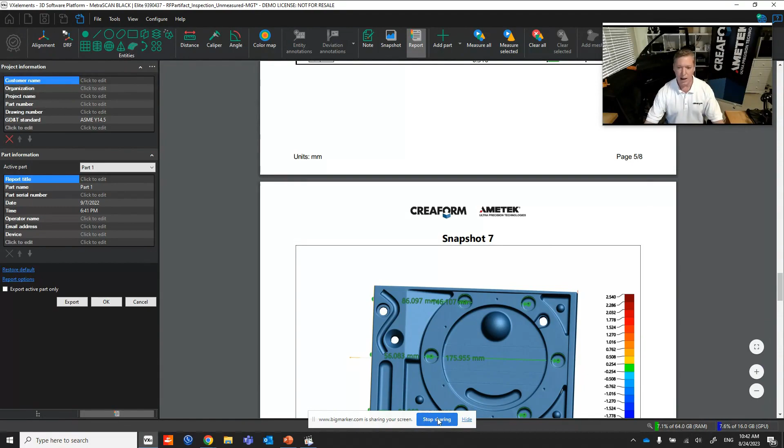All right, that's what I had for the software side. I'll send it back to Melissa.